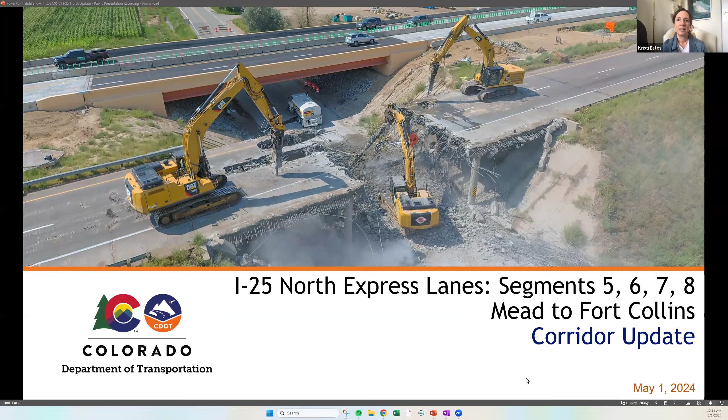We'll be giving you a completed segment overview, including toll lane and mobility hub commencement, a new construction overview, including scope, location, and timing, emergency services coordination, and interchange updates. We will also talk about High Plains Boulevard construction and give you the project contact information.

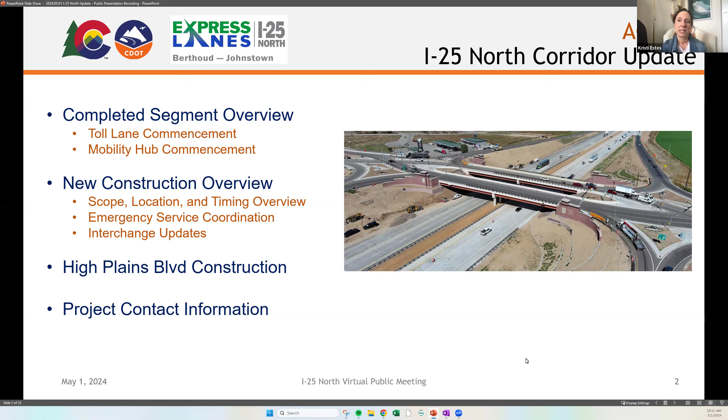Construction manager for segments 5 and 6. I'm going to turn it over now to Abra to get started. Thanks, Kristi. I'm the project director of these segments, like Kristi said, and I'll be giving you an overview of what we've been doing. As I'm sure you've noticed, there's been some construction in the last few years, and what we're going to be doing coming up in the next few years.

So we identify these work areas as segments, so you'll hear me referring to them as segments quite often. So segment 6, 7, and 8 are currently under construction. As you can see, we've put almost $1 billion into these segments, right over 900 million, for a total of just under 20 miles of improvements of adding an express lane, straightening out the horizontal and vertical geometry of the roadway for a safer and better operational movement between Fort Collins and Mead.

And so what we have coming up is segment 5. We're about 50% complete with design, and we'll be doing the same type of improvements in this area as well as you've seen in segment 6, 7, and 8. It's about a 6-mile stretch. We're estimating it to be about $425 to $450 million, and we're starting construction this month. So be on the lookout for temporary construction barrier coming up pretty soon.

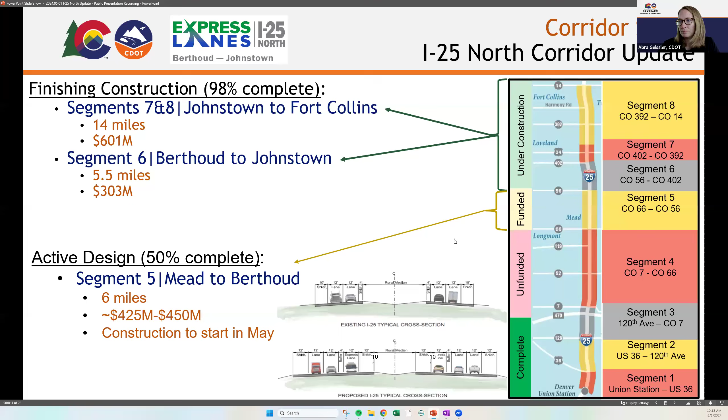And what we were able to accomplish in segments 6, 7, and 8, like I said, about 20 miles worth of improvements, 35 bridges that were reconstructed, which is a pretty enormous amount of bridges. We've added 2 new mobility hubs that we'll talk about a little later. We've straightened horizontal and vertical alignment to make it safer, and I'm sure you've experienced the better operations.

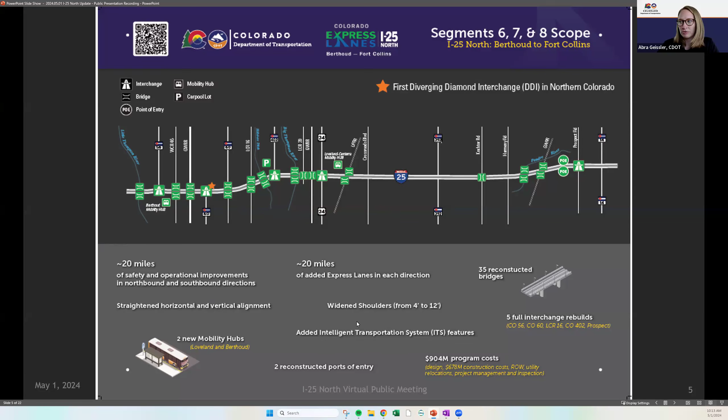The accident history to date shows about a 58% reduction in accidents from when we opened all of the new improvements to the previous 5 years. So definitely excited for the safer operations in the corridor.

And as you can see here at Colorado 56, this was actually the most dangerous area north of Denver on I-25. You can see the horizontal and vertical big curvatures here. And what we wanted to do was just straighten that out. So you can see what we were able to do where we actually flipped Colorado 56 with the I-25 main line due to topography in the area. It just lent itself to a better and safer alignment in this area.

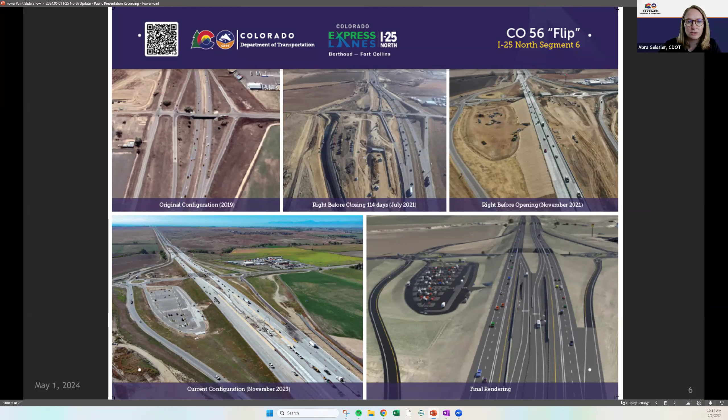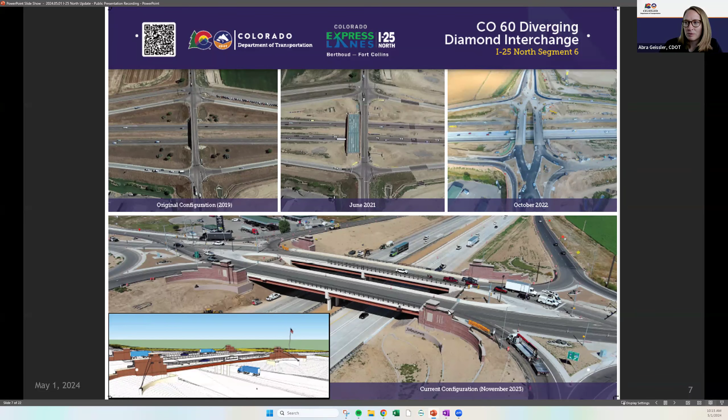You can also see the mobility hub that will be operational later this year, and we'll talk more about that later. At Colorado 60, this is the entrance, as you might know, into Johnstown, and also Buc-ee's has opened up. We were able to put a diverging diamond interchange in this area. If you build it, they will come, and we definitely saw that in development in this area. So we're excited that these improvements were made just in time for the increased growth in the area.

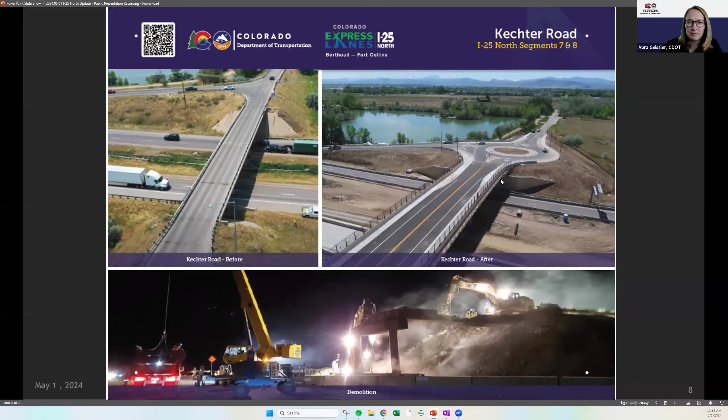And moving north towards more Fort Collins and Windsor area, this is the Kechter Road improvement. This was a really nice link that was made for the Poudre Trail system. It's not quite connected yet, so users had to cross this bridge. We were able to add bike lanes and make things a lot safer in this area. So we're really excited about the multimodal improvements that we made on the corridor as well.

And here is Prospect Road that, again, we just improved from a multimodal standpoint and added some capacity there to plan for the future growth of northern Colorado.

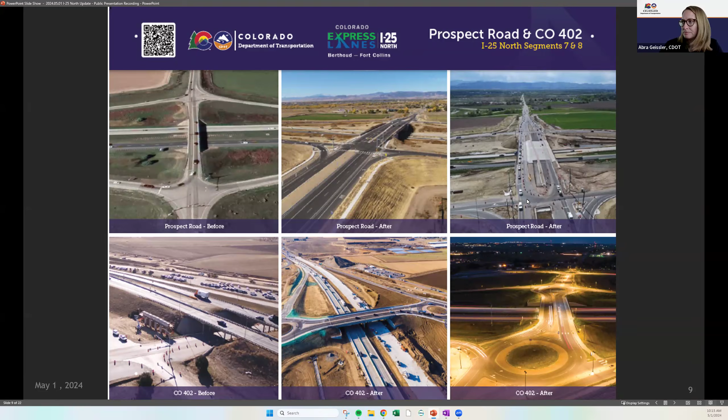So moving on to tolling, what the schedule looks like now is toll lanes are currently free, so please use them as much as you can. And we'll be installing the tolling equipment in summer of 2024. So we may have some intermittent tolling lane closures to add that tolling equipment in, but we wanted to get those lanes open for you all to use as quickly as possible. And then we anticipate the tolling commencement to start in fall of 2024.

Please note that weaving and speed limit rules still apply during the testing phase, and they will be enforced by law enforcement. We've been getting a lot of complaints about some pretty excessive speeders in the toll lanes that are tailgating, going very fast. Please, please, please adhere to the speed limits that are posted. They're the same as the general purpose lanes. We would like to keep this corridor as safe as possible, and going over the speed limit does not help that cause.

So once tolling begins, toll rates will be indicated on overhead signage, so you'll know exactly how much that tolling is. When tolling starts later this year, we'll have tolling evasion fines, which will be detected through weaving technology and cameras. So just because you don't see a camera in sight doesn't mean that it can't spot you. It will be concurrent throughout the entire corridor, and it will catch you if you cross those double whites. So please be mindful of the double white lines. You are not allowed to cross those, and you will get fined for that.

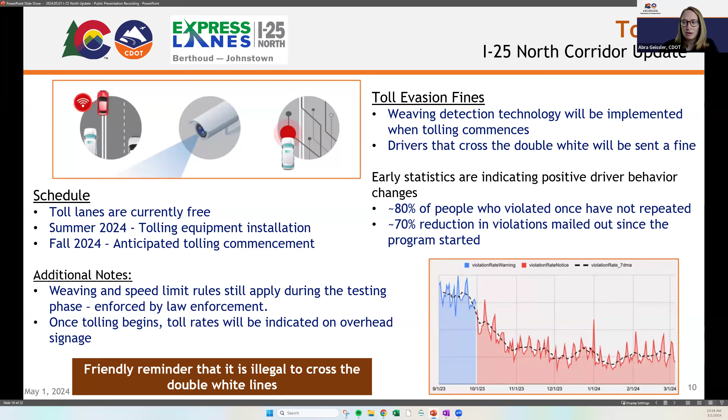This technology has been implemented in other segments on I-25 and E-470 and elsewhere, and we've actually seen some really good positive results. People who violated have learned their lesson that we're not just joking that there is this technology out there. It does exist, and they found out through a fine in the mail. So 80% of people who violated once have not repeated. There is a 70% reduction in violations mailed out since the program started. So we're really excited about those results and keeping the corridors as safe as possible.

And just as a reminder, there's a little different pavement markings than you might be used to. So we just wanted to go through an educational moment of how to use express lanes. So this picture on the left here, you can see the double white lines going into the skip lines. You are able to ingress and egress in and out of the express lane as much as you want safely in this double skip area. Once it goes to double solid, you are not allowed to maneuver in and out of those lanes any longer.

What you might not be familiar with that is out on segments 6 through 8 is a single solid line with a skip line. And so just think you're not allowed to maneuver if there's a solid line closest to you. So in this case, if you're heading in this direction, because there is a skip line closest to you, you're able to ingress into the express lane. In this situation, since there is a solid white closest to you, you are not able to make a maneuver in that specific area. You have to wait for a dash skip line to maneuver in there. So in this picture on the lower left here, you're not allowed to move into the express lane. There will be a transition where it goes from solid to skip. After that skip is present, then you may maneuver in there.

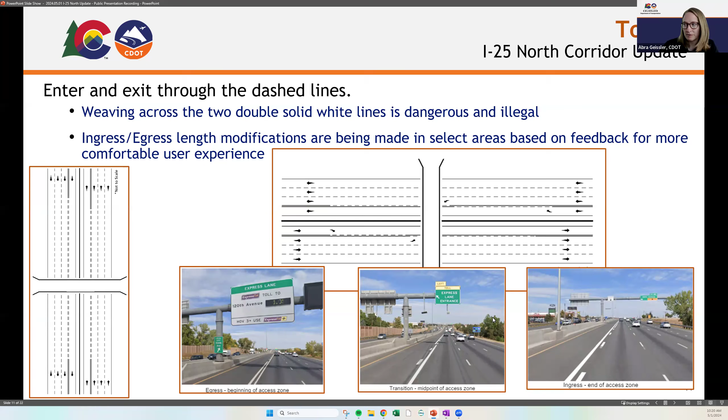And then just a reminder that you are able to use the express toll lanes for free if you have 3+ people in your car. So you're able to do that if you have the transponder and it is switched to HOV. So make sure if you're wanting to use the 3+ toll express lanes for free, then you have to get this transponder.

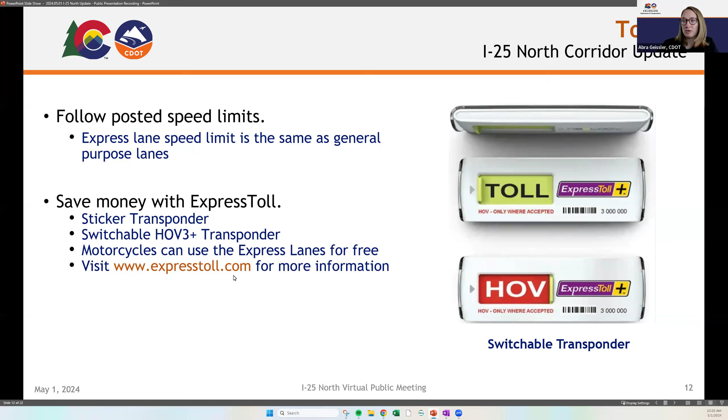Moving on to the mobility hubs. We've been working a lot on connecting the dots for the mobility hub network. The idea is to have these hubs every 7 to 10 miles so we can capture a good amount of people from the Front Range, but they're not making trips or making stops every mile as to make it non-efficient. So by putting these hubs every 7 to 10 miles, we're maximizing the efficiency of stops, also servicing a large amount of the Front Range corridor.

So we're actually adding 4 new mobility hubs within the next few years. The first one that is getting built right now is the Centerra-Loveland Mobility Hub, followed by the Berthoud Mobility Hub, and then the Firestone Mobility Hub. And then lastly, the Broomfield Thornton Hub at Colorado 7.

So the Centerra and Berthoud hubs are opening fall of this year. The Longmont hub is going to be opening later. Excuse me. The Berthoud and the Loveland hubs are opening this summer. The Longmont hub is opening in the fall, and then the Broomfield hub will be opening in summer of 2026.

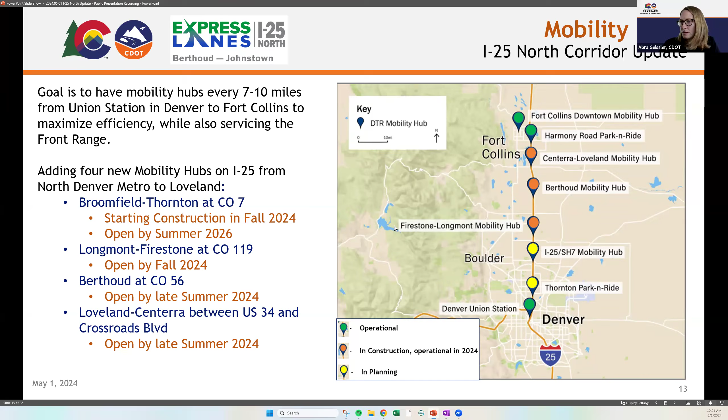So what these median hubs look like, which exist at both Centerra-Loveland and the Berthoud Mobility Hub, is we've actually situated the pickup location in the center of I-25. This really helps with the operations and the safety of the buses, and the buses will be traveling in the express lane.

And instead of having to maneuver into the general purpose lanes and then on the off ramp pick people up and then maneuver back on into I-25 and over to the express lanes, instead they're able to stay in the express lanes, do one lane maneuver over into the median, and safely pick people up in the median, and then away they go into the express lane. So a really safety and operational win in this sort of configuration and environment.

People will be able to park in the parking lots that are outside of I-25 and then walk underneath I-25 in these tunnels, which will be lit. They'll have cameras, emergency telephones. They'll have future electric vehicle stations for charging. So we've really tried to keep safety at the forefront when we're designing and building these.

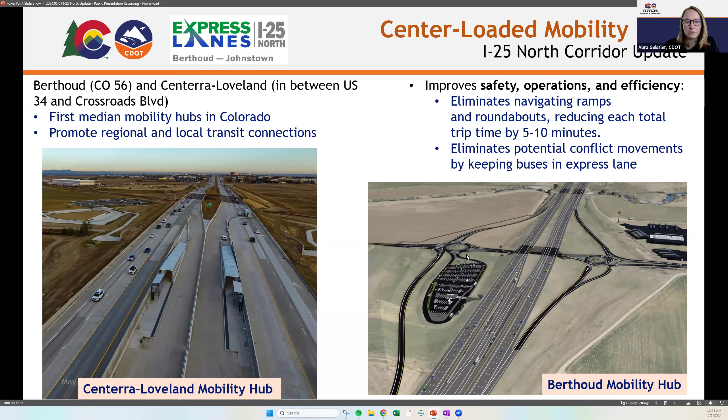And now I'll switch it over to Ben. He is our construction manager on segment 5, and he'll be going through all the improvements we'll be making on segment 5. Thanks, Abra. So looking in the past at what Abra just walked through with completion of segments 6, 7, and 8 to the north of this project, we have one new section that we're beginning working on, which is noted as segment 5.

And as a reminder from that exhibit that Abra had presented early on, that segment of I-25 is between Colorado 66 and Colorado 56. So it's the only area with just 2 lanes remaining. To the south of Colorado 66, there's 3 general purpose lanes. And then from Colorado 56 to the north, there is now 2 general purpose lanes and 1 express lane. So there's an existing bottleneck condition in the northbound direction at Colorado 66, where I-25 drops from three lanes into 2, that we would be addressing with this segment of I-25.

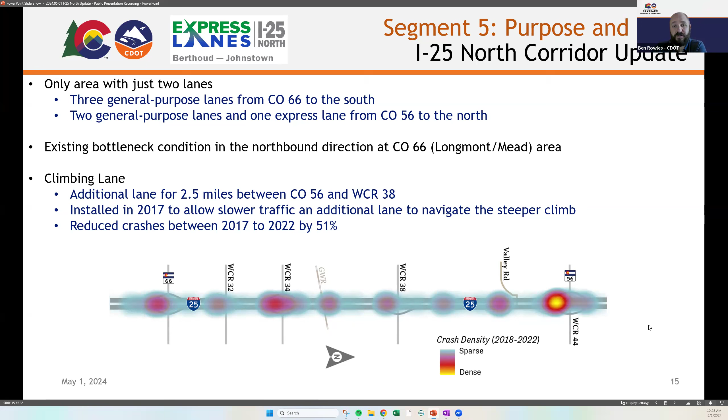And then additionally, there is a climbing lane south of Colorado 56 for the southbound lanes. So it's a 2.5-mile section, almost to County Road 38. It was installed in 2017 to allow slower traffic to move to the right during that steep climb as you head south from Colorado 56. It has been noted that it's reduced crashes between 2017 and 2022 by about 51%. So a huge safety improvement by adding that additional climbing lane. So that's the existing conditions out there.

So the scope of segment 5 and schedule for what we're proposing on beginning here soon, it's about 6 miles as stated. So we'd be improving safety and operations through those 6 miles by straightening horizontal and vertical curves throughout this section, widening the shoulders from a 4-foot shoulder out to a 10 and 12-foot shoulder. So much safer, more sight distance.

There's about 6 miles of added toll lanes in each direction with a new entrance in each direction as well. So very similar scope to what you would see up north, but just extending that same 2 general purpose plus the HOV lane down south, down to Colorado 66.

Additionally, this does include reconstruction of the Weld County Road 34 interchange - a complete new interchange, which we'll talk through here in a few slides. It includes building 8 new bridges at Weld County Road 32, the Weld County Road 34 crossing, the Great Western Railroad, Weld County Road 38, and Valley Road crossing. All of those would require new structures as part of this construction scope.

There are no sound walls being built. The project is preserving an earthen berm between Weld County Road 36 and Weld County Road 34 on the west side of I-25, near Mead. So that's the base scope - that's what we will be including with the project.

But we also have priority scope if funding is available, and that is to maintain the southbound climbing lane. In addition to the 2 general purpose lanes and the managed lane, we would hope to construct that climbing lane again, resulting in 3 general purpose lanes in that section, as well as a possibility of extending the toll lane south of Colorado 66 in the northbound direction, which would better tie into the existing 3-lane configuration for improved safety and operations of that section.

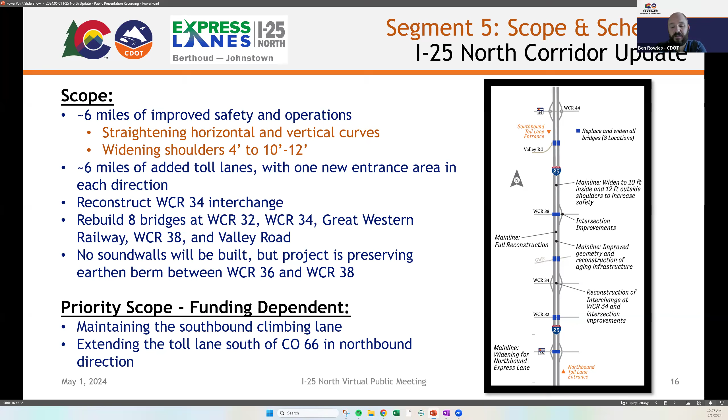So the general project phasing is going to be very similar to variations you've seen to the north, but we're currently under design. Design started in August of 2023 and is projected to be completed in December of 2025. We'll have several construction packages associated with different phases of construction, but the first construction package is 100% designed, and the rest of the corridor is about 50% designed at this point. This does also include right-of-way and utility relocations beginning in April of 2024 through approximately July of 2025.

Construction for this project is starting here in summer - actually this month, as Abra indicated, so May of 2024 - and is anticipated through spring of 2028.

Phase 2: once we complete phase 1, traffic will be moved into a head-to-head configuration on the northbound barrel, and we'll begin construction of phase 2. Phase 2 is full construction of the final southbound barrel, including all the new structures, scheduled from November of 2024 through December of 2025.

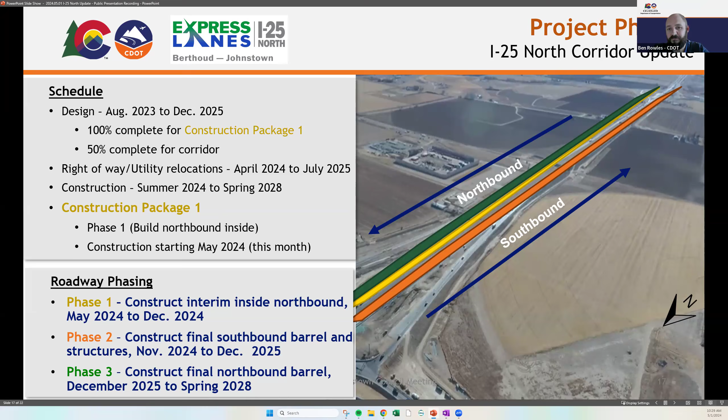There won't be a significant difference in the phasing or the packaging, so when you're driving through the corridor, you may not be able to determine what construction package is progressing because they all work together and overlap slightly. But that's the general phasing of how we're planning to construct the segment 5 package or corridor.

So some specific highlights at the Weld County Road 34 interchange: there are 2 new roundabouts planned at this location. There's a new structure going over I-25, which will expand the existing infrastructure out to 2 12-foot lanes, a 5-foot shoulder combined bike lane, curb and gutter through here, and an 8-foot sidewalk.

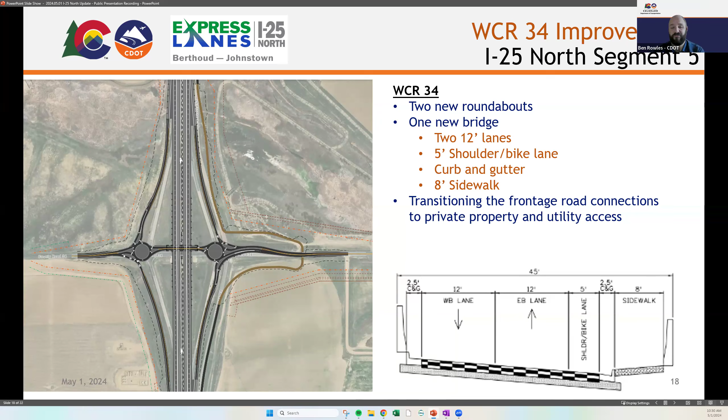One thing we'll talk through in a couple of slides further is that we'll be transitioning the frontage road connections to private property and utility access - very similar to what was completed in segment 6, where that existing frontage road is being transitioned into a different facility. So we'll be constructing some local access roads there instead.

At Weld County Road 38 interchange, again, that would be a new structure over I-25 with an 8-foot sidewalk, tying into existing infrastructure as it stands right now.

There is a new interchange process in place right now through the town of Mead. They are submitting an application for a new full access interchange at this location, which will ultimately need approval by Federal Highway Administration, FHWA, and CDOT, with a determination on approval in about 18 months or so.

So we would request if there's any specific questions about this process for the new interchange, it is being administered again through the town of Mead, and we would recommend reaching out to those representatives to get more information on that project.

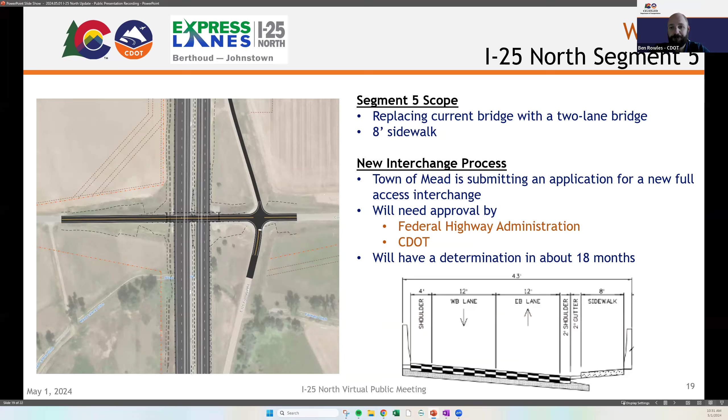This is a future item, a future project. There's certain portions of it that have already begun. But in general, frontage roads, when they were originally installed with the construction of I-25, were not designed or intended to handle the traffic volumes that we're seeing in northern Colorado as we continue to grow. So looking at safety and accident history on those frontage roads, specifically where they tie into the crossroads, looking at operations and development access, as well as ultimate right-of-way needs for I-25, all of that made sense to look at a parallel alternative.

So this parallel alternative is the High Plains Boulevard. The vision for this road is a safer, more efficient north-south arterial. It's roughly a half mile to the east of I-25, and it varies as it jogs through local roads and municipality areas.

It will be developer driven and local agency responsibility to own and maintain. So it is no longer a CDOT or state facility. It will now be constructed and managed through local partners, including the Town of Berthoud, Johnstown, Larimer County, Loveland, Mead, and Weld County. They're all partners at various segments throughout this section of the High Plains Boulevard.

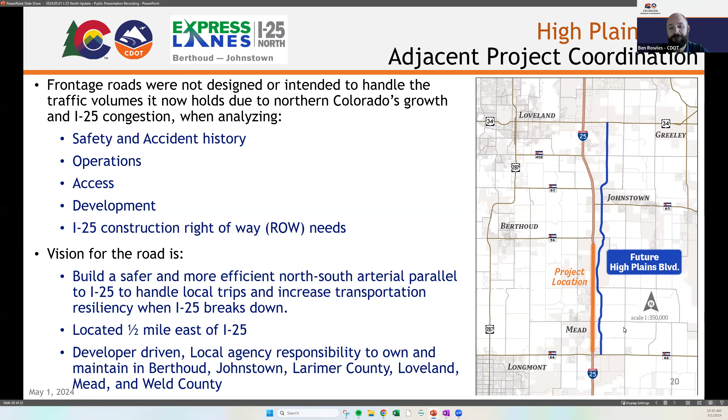Specifically, there are a few segments immediately adjacent to segment 5. Weld County is constructing High Plains Boulevard from Weld County Road 32 up to Weld County Road 34, and they have already begun that process. There is possible developer-driven construction to the north of that, from Weld County Road 34 up to Weld County Road 36.

Again, all of these different segments are in progress depending on developers and local projects that are happening. So you'll see over time that progression of those sections get completed for High Plains Boulevard.

I think it kind of highlights the close proximity to I-25 and our planned reconstruction of these facilities, that we are working in close relationship with those working on those sections of the High Plains Boulevard, including Weld County, Mead, and developers.

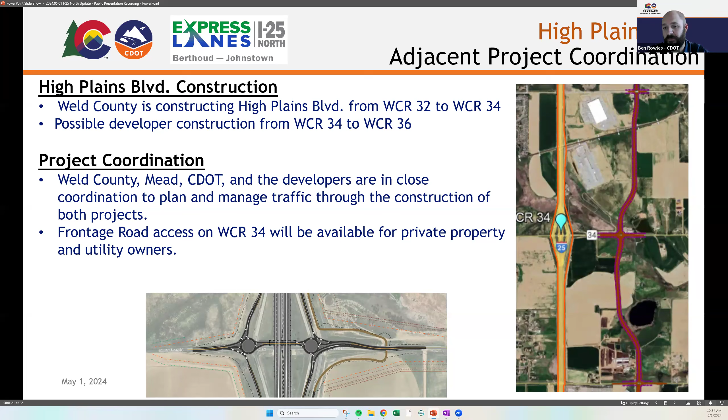So again, if there's specific questions about the High Plains Boulevard construction, this is a joint effort, but primarily driven through your local municipalities. So if you're curious about a certain area, there are contacts for those segments, and we would recommend you reach out to those local representatives to get more information about the construction of those portions of High Plains. So that is all we have today.

I don't know if Christy, if you want to walk through the final slide here.